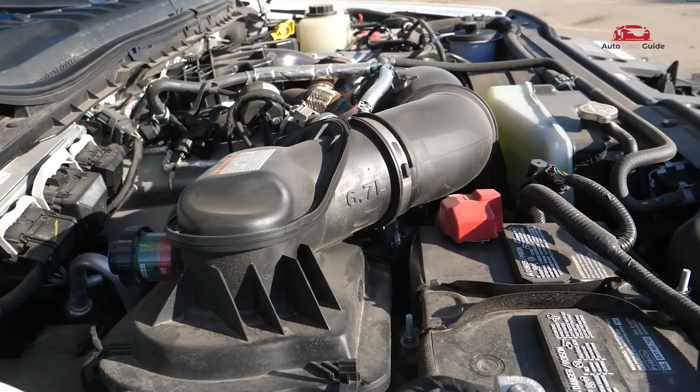Curious about the fuse box location and diagram for the Ford F-250 2020 to 2022? Wondering where each fuse panel is and what its functions are? This guide answers all your questions, helping you easily locate and understand every fuse.

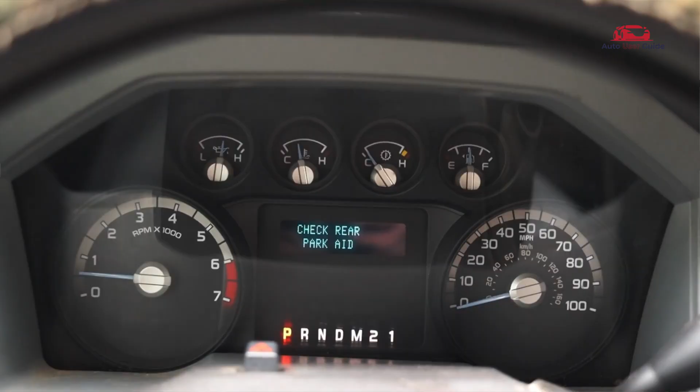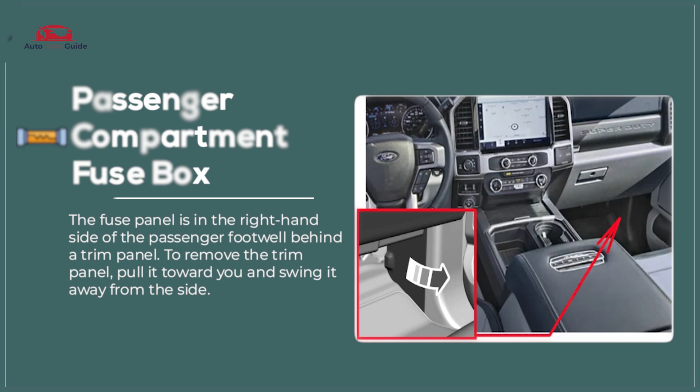Passenger compartment fuse box. The passenger compartment fuse box in the Ford F-250 2020 to 2022 houses fuses and relays that protect key interior electrical systems. It controls functions such as the power windows, interior lighting, infotainment, and climate control. The box ensures safe operation by preventing circuit overloads. It includes both mini and micro fuses for various amperage ratings.

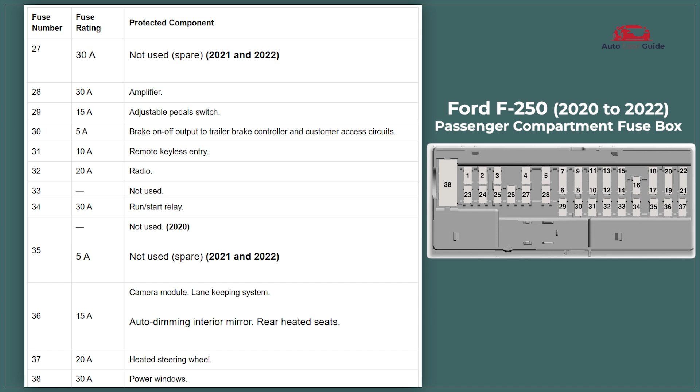Engine compartment fuse box. The engine compartment fuse box in the Ford F-250 2020 to 2022 manages high-power circuits essential for engine and drivetrain performance. It protects components like the fuel pump, cooling fans, trailer tow module, and powertrain control module. The box includes high amperage fuses and relays for efficient power distribution. It ensures system integrity under demanding operating conditions.

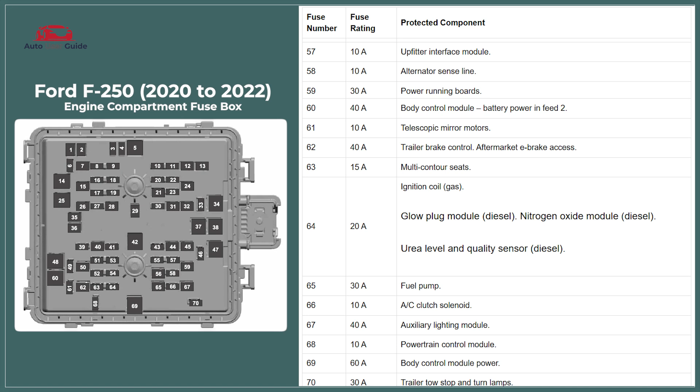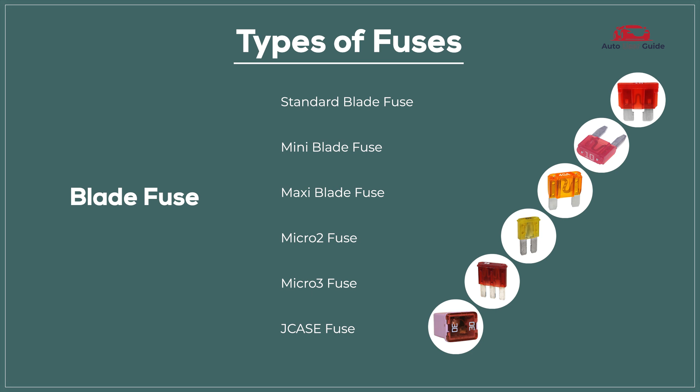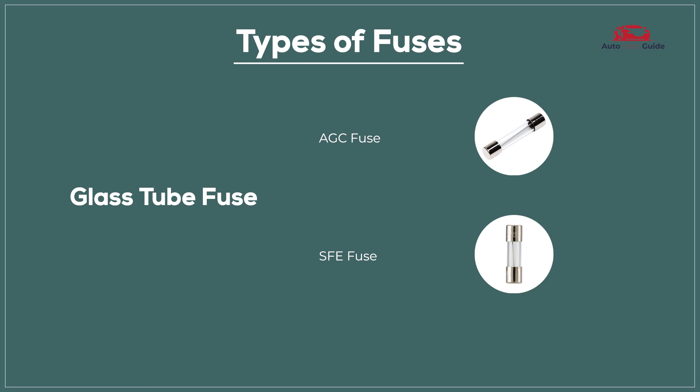Types of fuses: blade fuse, standard blade fuse, mini blade fuse, maxi blade fuse, micro 2 fuse, micro 3 fuse, J-case fuse. Glass tube fuse, AGC fuse, SFE fuse. Ceramic fuse, Bosch fuse, DIN fuse. PAL fuse, low profile PAL fuse, standard PAL fuse. Link fuse, mega fuse, high amperage link fuse.

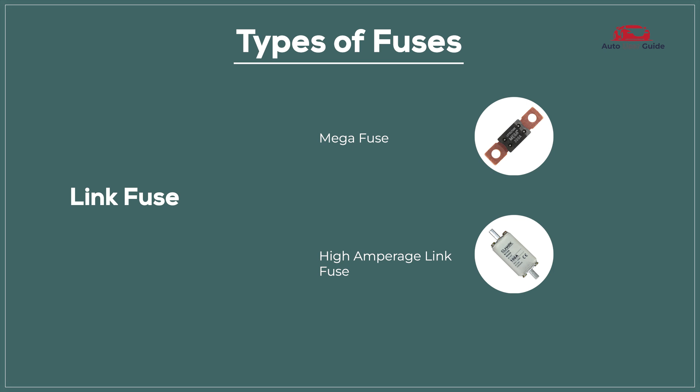Fuse conditions. Blown fuse: a blown fuse means it's no longer functioning and needs replacement, while a perfect fuse is in good working condition and performing as expected.

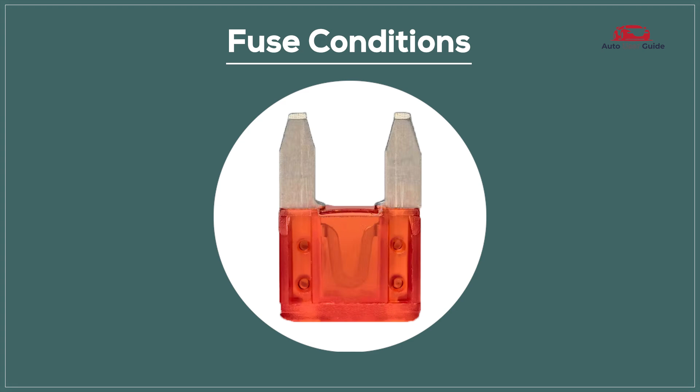How to change fuses: turn off the vehicle, locate the fuse box, identify the faulty fuse, remove the faulty fuse, inspect and obtain a replacement, install the new fuse, test the replacement.

Safety precautions: disconnect the battery, wear protective gear, use proper tools, check for correct amperage, avoid water exposure.